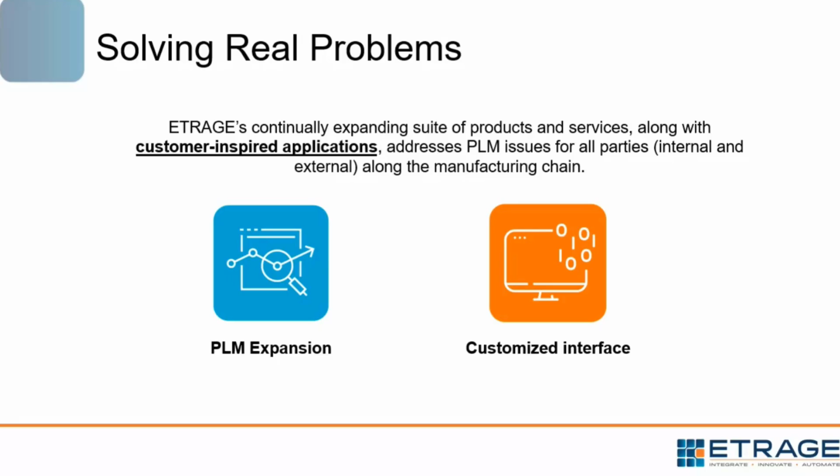Yeah, so I'm just going to quickly run through just a high level why this whole discussion is important and give a little bit of context. And then Ben's going to jump into a little bit more of a detailed demonstration of how we might be able to help you guys with your Creo cabling. This is definitely a deep subject. There's a lot of topics that we can cover within it. So to the extent that anybody wants to connect after the call, we're certainly happy to talk through any of this.

So just to kind of get started, I think I want to highlight what the typical approach to cabling in Creo looks like, right? This is just what we've seen as through lines with all the customers that we end up talking to. You might have some 2D schematic concept design that lays out your bill of materials and the components that are going into your model. You also might do some sort of detailed design in terms of electrical components. You might route your cables, you might place connectors, you might just leave space for those in your model.

But typically what we see in terms of downstream deliverables are in fabrication, where you're ordering a cable or ordering components based on your ECAD definition, because this has that full list of components that you need. And then same thing, you might use a wire list or equipment list that also might come from the ECAD side of things. So just to quickly highlight on the design side of things, again, typical things that we see: some teams use intelligent ECAD tools that have metadata that is exportable.

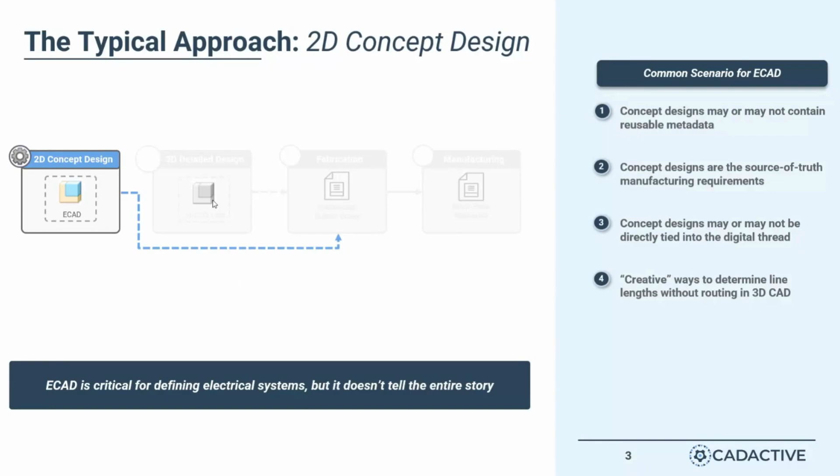And so the problem with this is that there's no spatial awareness of how the cables might be routed, where they fit, if they go around this corner properly. So we see a lot of companies getting real creative with how they determine line lengths, whether that's just in a first article, doing some rough measurements, or sort of hacking it in the Creo side of things and building something that's not necessarily reusable, but shows the space claim. They might fudge the design a little bit.

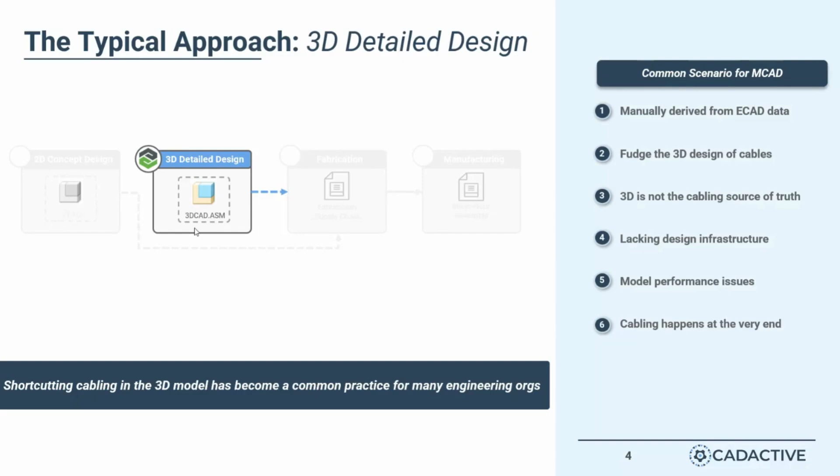Then also on the 3D design side of things, I think there's a lot of reasons why folks don't route cables in 3D. It's hard to do. We're going to get into that a little bit at the end, but this kind of results in cabling happening at the end of the process. You kind of need your model to be mostly created in order to understand how the cables are going to route through it. But a lot of companies are shortcutting this 3D detailed design for electrical today.

And on the design side of things, we're already strapped for time. If leveraging the 2D schematic works for your downstream deliverables and you figured out this process and it's been in place for many years, it's hard to change. Mostly because that value recognition happens downstream. If we build better 3D cabling models, there are benefits downstream, which we'll cover. But the design teams aren't necessarily seeing that as a benefit for them. It's more of an extra thing on your plate.

And so what this results in are folks and companies not changing, staying at status quo. If they do go and tackle 3D cabling design, maybe one or two experts know how to do it. That creates bottlenecks, that creates scalability issues. And at the end of the day, it devalues your 3D digital product definition.

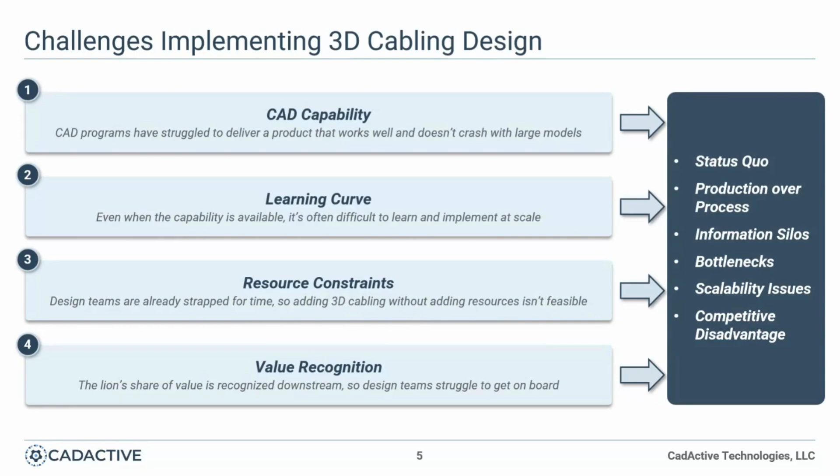And so what are some of those delays and why is this a problem at the end of the day? If we're not building great 3D designs, well, we might not understand that a cable fits where we think that it fits. The bend radius might not comply to the way that we think it would. This is basically just going to create rework. And the later that we discover this rework, the more expensive it is for the team.

We ordered a custom cable, it wasn't the right length. We either have to fix it or order a new one. Maybe you had the wrong equipment in the diagram or in the model. We can't run digital validation accurately. We can't do any clearance or creepage analysis. We can't really create work instructions that show that 3D representation. We're just using the 2D schematic. So it creates a lot of challenges downstream.

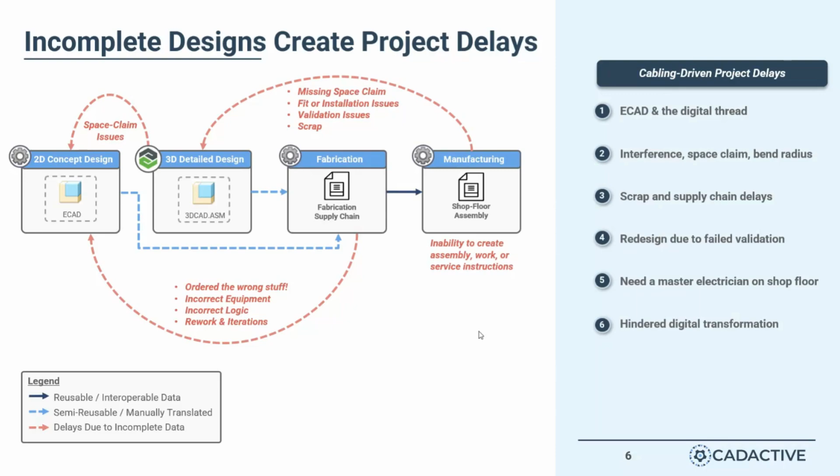And then I think what we would propose and what we see as best practice would be connecting that 2D concept design with your 3D detailed design and leveraging that 3D detailed design as the source of truth for manufacturing. And this is basically the other side of the coin. We know that we order the right stuff on the first try every single time. We uncover issues with our product earlier in the process. We remove late stage rework. We allow for Industry 4.0 and cutting edge technology like model-based, like digital work instructions. We can use that 3D definition for a lot of things.

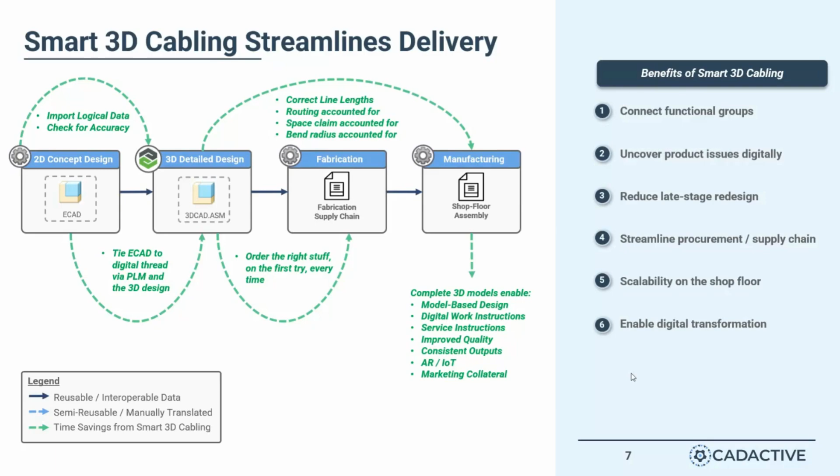And I'm certainly flying through here, but yeah, so how do we do it? CadActive is a company that can help you guys modernize your electrical design. And there's a few ways that we think about that. Number one is to take that 2D data and connect it with the rest of your organization.

Natively, Creo Parametric can ingest Creo schematics files, but it's rare that we come across a company using Creo schematics today. So there's a decision point: do we need to change our whole ECAD tool, or is there a way to integrate something like Capital Harness, EPLAN, or Zuken into Creo?

That's something we've helped a lot of companies with—not having to uproot that whole schematic design process, but still being able to leverage that intelligence in the 3D model.

Then on the 3D side of things, there's typically an implementation effort with Creo cabling. That just means setting up your design strategy. The thing with cabling is that it has to happen in context of a larger assembly, so we've got to do things right so the model doesn't break, you don't have performance issues or crashes, and so you can feasibly perform the design.

We need to create standard catalogs, components, and spools that match your schematic components so Creo knows what it's ingesting from the schematic design.

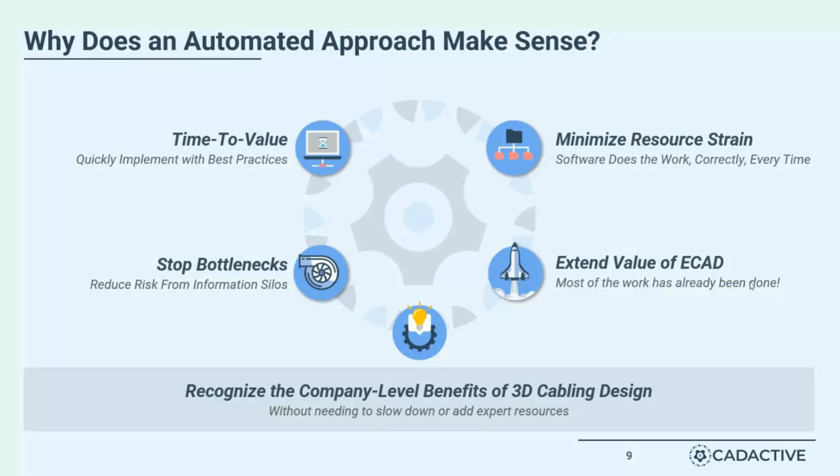And that's all I had to show—so, certainly at a high level. I think we want to talk to you guys a little bit about some of the tools that we've created within Creo cabling, and I'm going to pass it over to Ben for that.

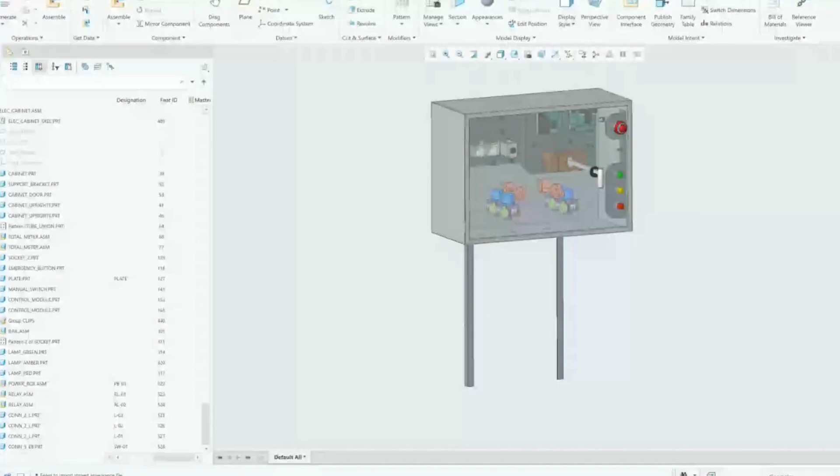So here we have a model of an electrical cabinet, and the first thing I'll do is switch to a simplified rep so we can see things a little better.

Basically, where we're at right now, we have our connectors and everything assembled into this model, but we have nothing in the way of a harness part. We have no network. We don't even have the spool files in here or anything like that. So the goal of this demonstration is to do all of that.

Create what we consider to be a best practice—this doesn't have to be the way that it works, but it's just the way I'm set up to work with it. I'm going to create a subassembly that contains my harness, and it's also going to contain a skeleton model with all of the copy geometries and references needed to create that harness. For anybody not familiar with skeleton models or copy geometries, it's just a reference management tool within Creo, a way to reference copies of geometry instead of the source geometry so you can minimize the size and time it takes to calculate your references.

It's just better for model performance, and it can help reduce errors in your model tree by being more conscious of the references you're making. So at a high level, we're going to create an electrical routing subassembly, have a skeleton model in that with all the references we need, and then create a harness part and route a bunch of wires inside of this cabinet.

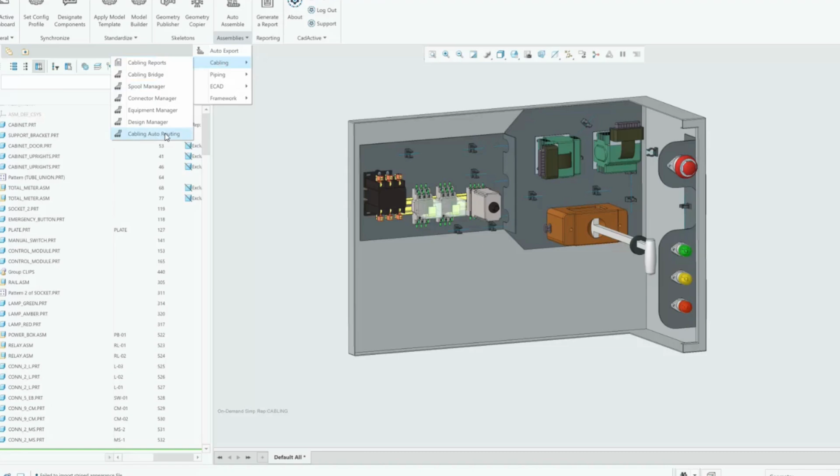But the reason I bring that up is I don't even have the cabling application active right now, and I'm still able to access our auto routing tool and do all of this cabling work without even turning on the cabling application.

So this is our auto routing GUI that's going to pop open here. I can either select an assembly that's already existing, or I can choose to create one on the fly here, which is what I'm going to do.

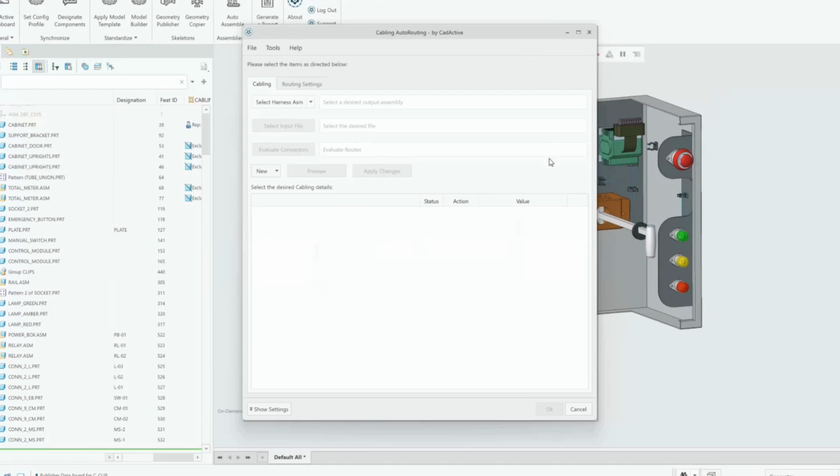I'm going to follow a standard naming convention here. My top level assembly, as you can see up here, is elec_cabinet, so I'm going to name this elec cabinet routing, and it's going to have all my routing information in it. You can see a bunch of stuff happening down here in the message log. Once this finishes creating, I'll show you what we actually just did.

Should be about done here. There we go.

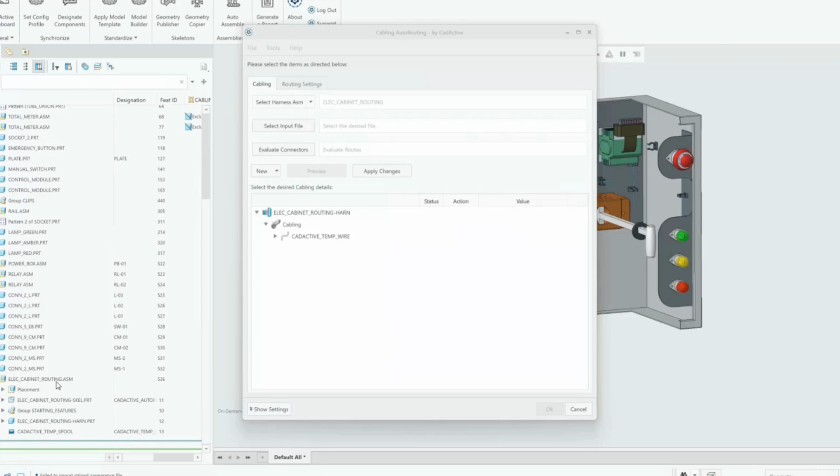So here is our subassembly that was created. Inside of it, I have a skeleton model, like I mentioned. If I look in that skeleton model, it has a whole bunch of stuff that just got created while we were waiting. All of these are grouped by model, by component specifically. And then inside, if I open one of these groups, it has a whole bunch of copy geometries of all of the relevant things from that model.

In this case, CM01 is a connector here. It has a whole bunch of entry port coordinate systems, and each one got its own copy geometry. Specifically, these are external copy geometries. Again, that's just something we consider a best practice. All of this is configurable—you can make it in whatever way you need—but by default, this is what we consider to be a best practice, these external copy geometries.

We also created a harness part inside of here. For right now, that harness part has a temporary wire feature and a temporary spool that we put in here, but essentially this harness part is empty for the time being.

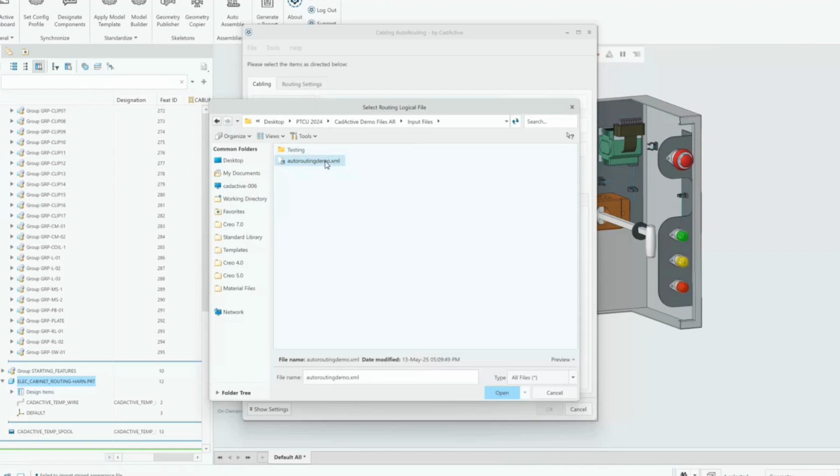The next thing I need to do is go find my input file. So here I have my autoroutingdemo.xml, which has information about a whole bunch of different wires that we want to go route.

And that might come from your ECAD tool, right? Whatever it is, whether it's schematics or Zuken or EPLAN or whatever—we'd expect that to be a direct export from your ECAD tool.

So before I actually hit go on this, I'm going to flip over to this routing settings tab. In here, we have a whole bunch of different algorithms that we can use to solve for the path, the A to B path that we want to use. Here's a list of the different algorithms we offer. I'm going to pick this one.

Then there are a bunch of different variables that control how hard the algorithm is supposed to work. It's kind of a seesaw, a balance—we want it to work hard enough to give us a good result, but if we crank all of these variables way up, it's going to work really, really hard. It's going to take more time, and we might see a minimal benefit as far as finding the right balance for these. That would be part of an implementation process.

These values may be different for different companies based on their models and particular use case. So as part of implementation, we would usually do a study and run tests with different values for these variables to find a sweet spot—where we can live with the amount of time it's taking, and the results we're getting are pretty good. So I'll just tweak a couple of these.

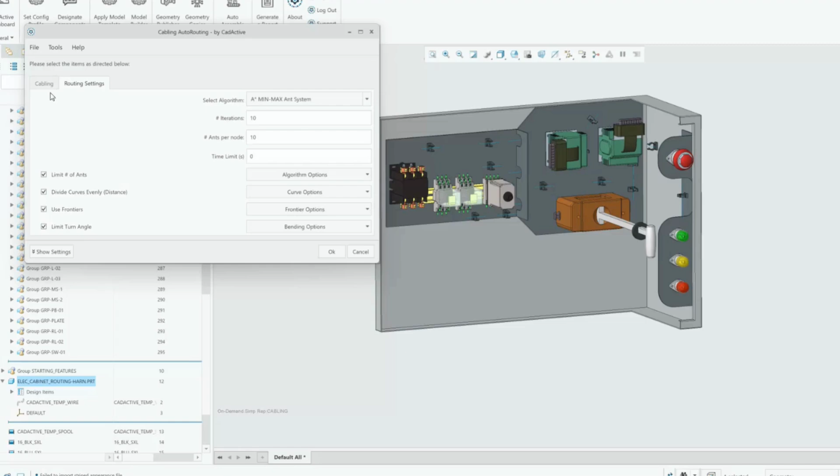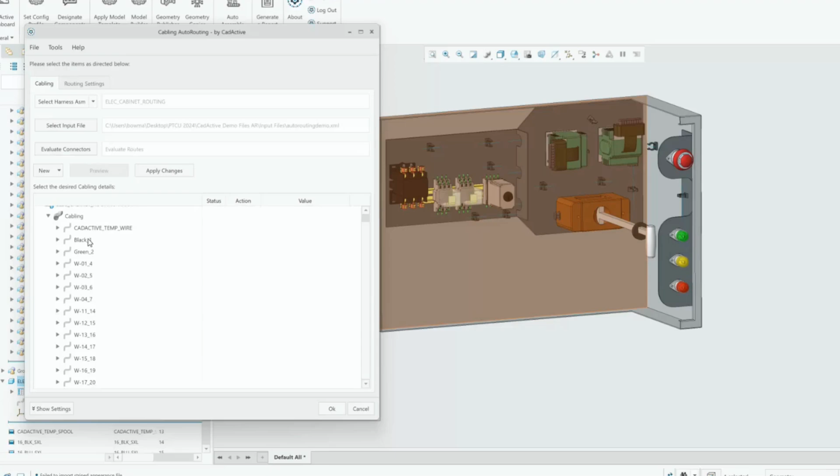We also have the capability to save profiles into the web application portion of this. You can save different profiles and different values for the settings within those profiles. The idea being that maybe you have a first pass and a second pass. Your first pass is a little bit rougher, but it runs really fast. So you run your first pass, and that's good enough for 90-95% of your wires or cables that you're routing. But then there's a couple that maybe don't look as good as you wanted. You can just go specifically to those 2 or 3 wires and change their routing profile to be second pass, or whatever you want to call it.

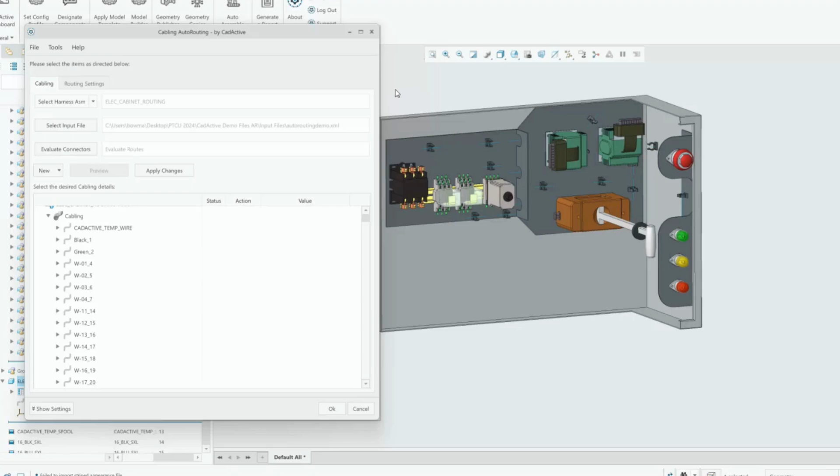And now just on those couple that need the extra calculation to be done, they can take a little bit longer for just those few, but now we're not waiting on the entire model to have those same routing settings on everything. All right, with that being said, let's go ahead and click OK.

So while this is evaluating, I do want to talk a little bit more about that input file. Like Phil mentioned, this is something that's going to come from your ECAD tool. As long as you have an ECAD tool that is intelligent and you can export information from that tool, that's typically good enough. If we can get information out, we can get that out and do what we need to do to get that into a format that we can work with.

So of course we work with Creo schematics, obviously. But for example, this XML file that I'm looking at in this example, this is a format that we got out of AutoCAD Electrical. So again, the ECAD tool that you're using does not matter. We can take any sort of format and get it into this tool and use it to auto route these wires.

And then another thing that I would say about this, so I'm running it manually right now. I'm actually clicking the buttons and saying OK and feeding in the input file. We also can run this in batch. We can run it in non-graphical mode.

You can have a worker machine that's just set up with some listeners, and as orders come in, it populates a file in a certain folder, and that kicks off an event where that worker machine now spins up Creo in non-graphical mode, opens the model, runs auto routing with the input file, saves it, and stores it in a different location. And all of that can happen without the interaction of a user.

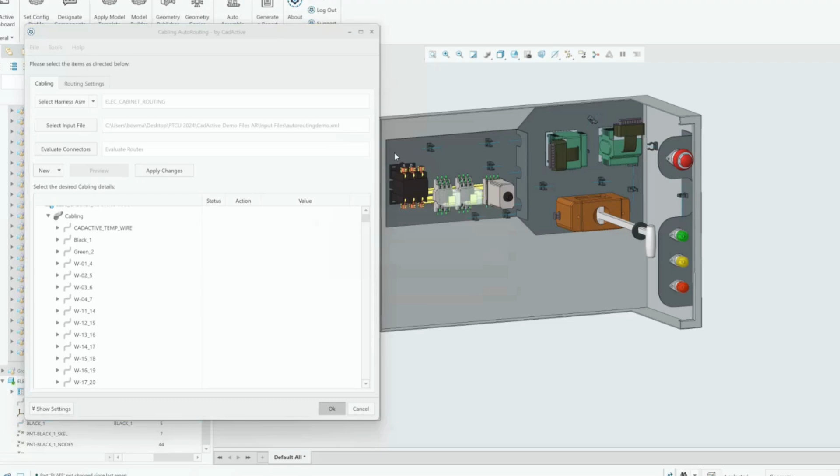There we go. And now we're done. So this went through and routed all of these wires.

If we look in the harness part now, we can see there's a lot more features in here than when we first started. I have the settings on here set up in a way where it's creating a bunch of these point features. This is really, I think it's worth showing here. This is kind of showing the points that are being evaluated by the algorithm. And then finally, this final point feature - these are the points that are actually being used as cabling locations to create the route, the shape of this route.

So like I said, I have my settings so that it creates all of these. These are the things that are being evaluated no matter what, but I can turn that off, and essentially what I would get would be just my wire feature and then one point cloud feature that contains all of the points that are being referenced.

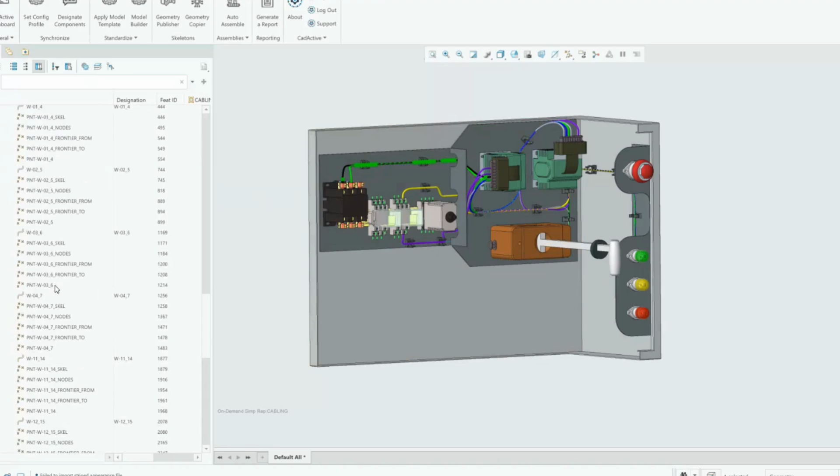Just to show another example, I think this one's good. You can see all of these points that are being considered and used for the routing. But yeah, that is really the main point of the demo.

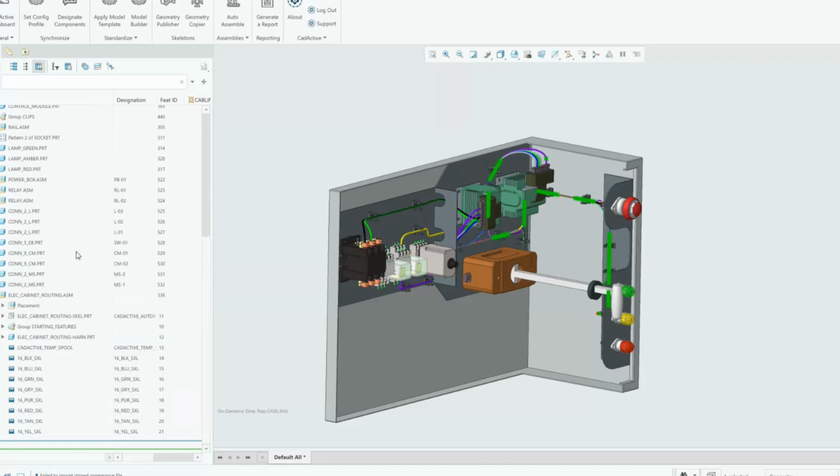So if we were to take a step back and summarize from a high level, what did we do? In that short amount of time, we created this good structure that we consider to be a best practice. We're not relying on people to remember exactly how we want this set up. It's all driven by the automation. We've created that subassembly with our good structure, built out a skeleton model with all of these different copy geometry references that we want to use for our harness, and then, of course, created our harness part and routed all these wires.

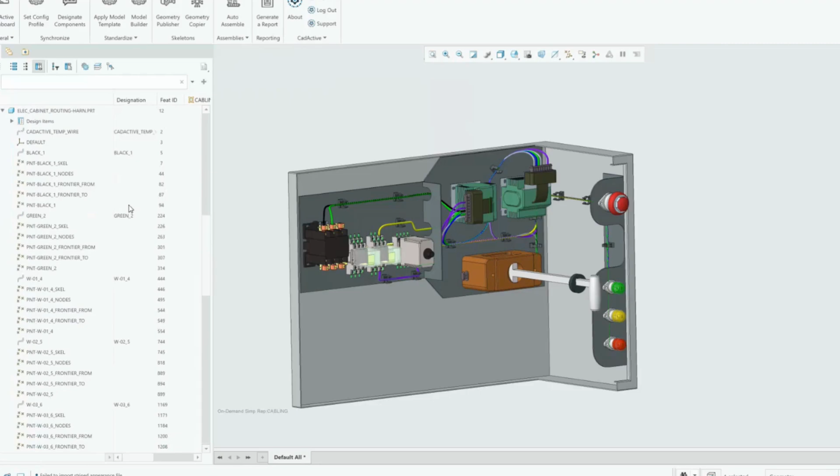I'll point out there is no network in here. Each one of these wires is having its path solved by the algorithm. It is creating those points per wire and then routing the wire along the points in that point cloud feature.

One other thing I'll point out, just a final point. The way we are working with this demo, the connectors themselves are not inside of this subassembly. That's just the way I have it set up to be working right now in this environment. That does not have to be the way this works. We can set this up to not happen within a subassembly at all if that's the structure you need, or we can set it up so that the connectors are brought inside of that subassembly.

We can actually use another tool of ours called AutoAssemble that can be rolled into the auto routing process, where you supply an input file, say go, and before it starts solving for these paths, it can actually assemble all of the connectors and electrical equipment that you want first. So instead of having this stuff already sitting there, we could have assembled our connectors, designated them, and then created all the wires and routed them.

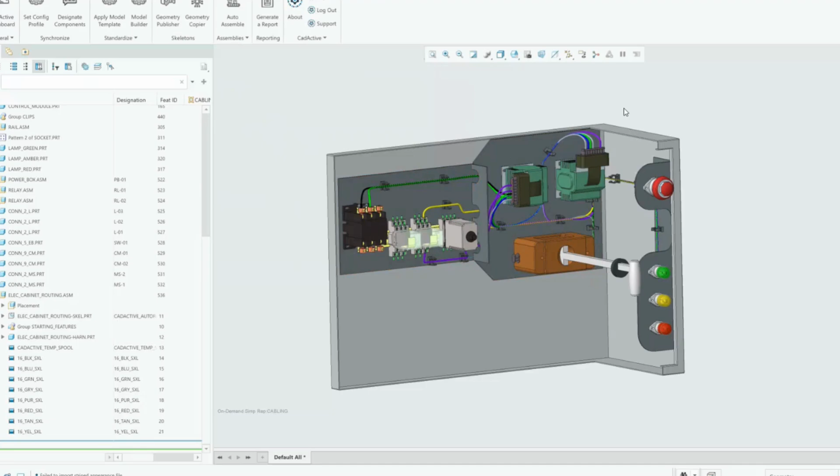So just a couple different options. Like I said, it's very configurable. There are a lot of different ways that we can set this thing up to work depending on the use case.

But yeah, with that being said, I think we can probably pass the ball back and move on to some Q&A. In terms of use cases, like Ben said, we've done some really high volume use cases in command line, non-graphical mode with this.

We could run this in point-to-point wiring, kind of like you see here. We could run it with a complex cable and take bundle width into account. We could run it with a complex harness that has different branches on it.

One of the points that Ben has touched on a few times here is that we're offering an off-the-shelf application, but it never looks the same for two customers. We typically configure it on a customer-to-customer basis so that we know it works the way that you want it to work, and then we let you run with it. You don't have to fit into our structure, we'll fit into your structure.

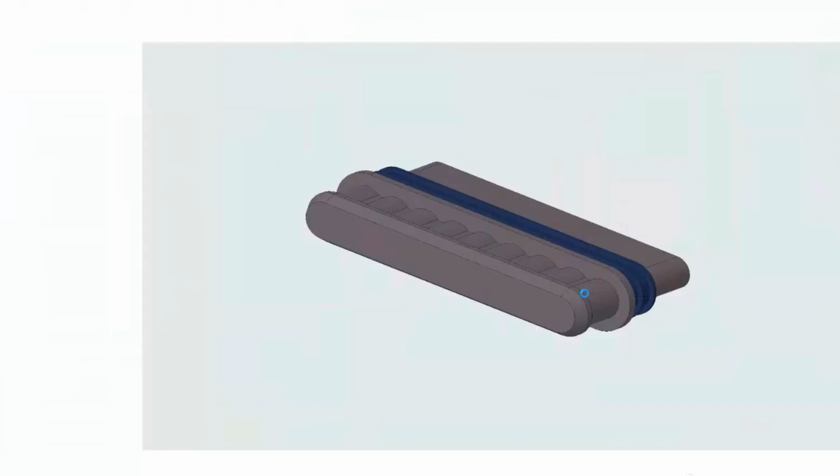Okay, so I'll open up one of these connector models. This is part of a library definition, and this is actually something you can use with or without our tools—it's just part of Creo cabling functionality. So on this model, there are a whole bunch of these coordinate systems that are all intended to be used as entry ports.

Let's see if these are set up properly. These actually are not even set up properly, so yeah, we are handling this and being able to route to and from these even though they don't have the proper parameters on it. But what I was going to say is, this is the part that's just native Creo cabling, whether you're using our tools or not.

If you go to these coordinate systems that you want to be using as entry port coordinate systems, you can create a parameter on here that is entry_port, set it to a Boolean, so a yes/no, and then set this to be yes. Because this coordinate system has a feature parameter on it—these parameters are on the coordinate system feature itself, not on the model—this coordinate system can have this entry port parameter set to a value of yes.

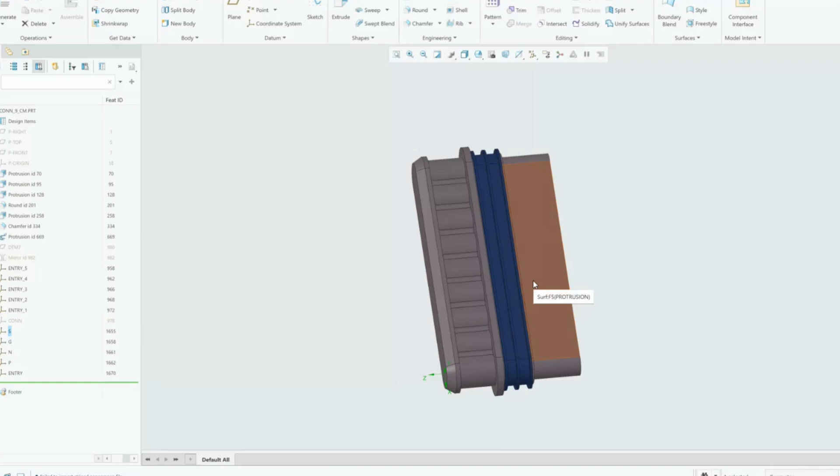Now, because that's there, if I were to use this connector in an assembly and designate it—I'm sure you're referring to the normal process, where you designate that connector, then say entry ports, and have to go control-select all of the coordinate systems you want, then set an internal length if you want, all those other things—having that feature parameter on this coordinate system bypasses all that. So Creo, when you designate this connector model, will find that parameter on the coordinate system and automatically understand that this is supposed to be used as an entry port.

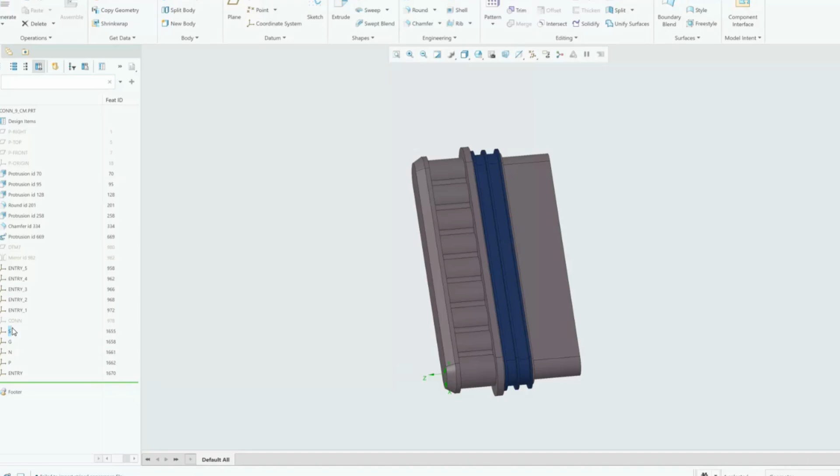We can also have other parameters. You can have an internal length parameter here, a grouping parameter here, a pins parameter here. There's a whole set of feature parameters we can use on here that will automatically propagate information into your model where this connector is being used.

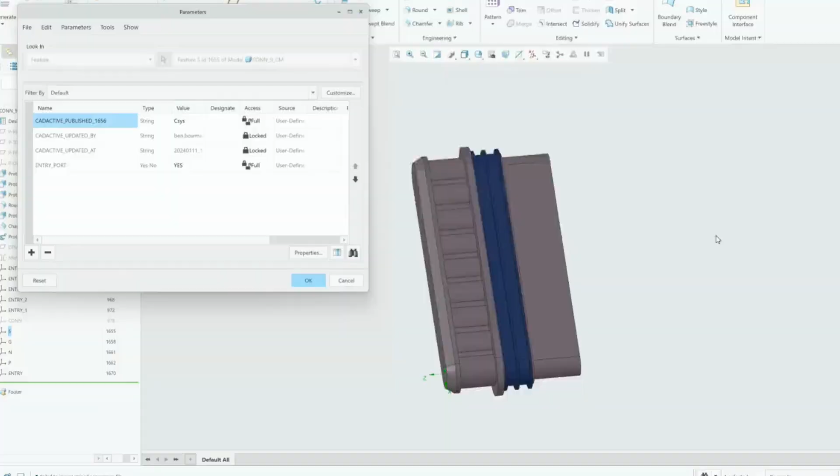So I guess that was a long-winded answer, but in summary, we obviously don't have to have that parameter there to use it, but that's typically a good idea as a part of your library management process. When you bring in connectors, you add these feature parameters onto those coordinate systems, and it can speed things up for you down the road.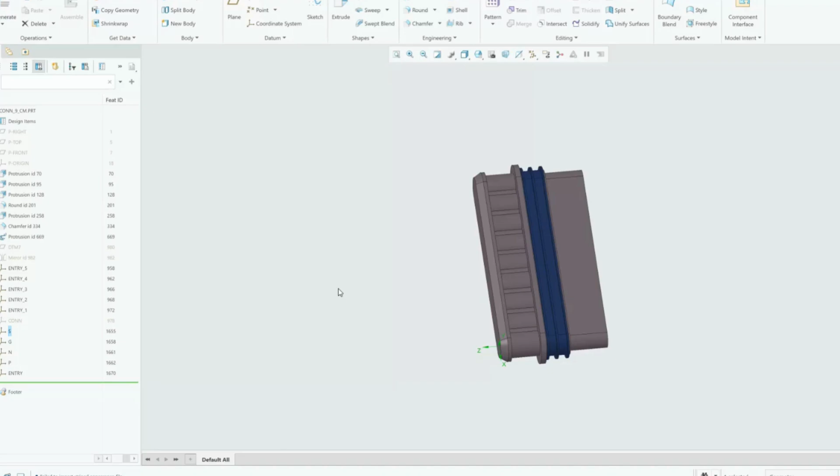All right, got a few more for you. For the routing rules, can we define specific clearances we want to keep away from other component hoses or tubes? Okay, that's a good question as well.

The way we are set up today, we can provide information to these routes using a couple parameters called use path and required path. With use path, as you're evaluating the route for this wire, we want you to try to use anything that has a naming convention that looks like this. Required path is saying, I don't care where it is, if it has this naming convention, you have to use this as a part of the route.

The idea here being—I think of one of our use cases that a customer is doing—they have certain areas where there's like data wires versus paths that are supposed to be used for power cables, AC versus DC. They have things like that set forth in their model.

Another good idea would be like, if you have a cable tray or something like that, use that in the use path—use any cable trays essentially. Any of this information that we can provide into the model or algorithm is going to help make the route better. In this case, I basically said try to use clips, and so it's routing through all these clips, the ones that make sense for the particular route. But in terms of interference detection, that is actually something we are still working on adding.

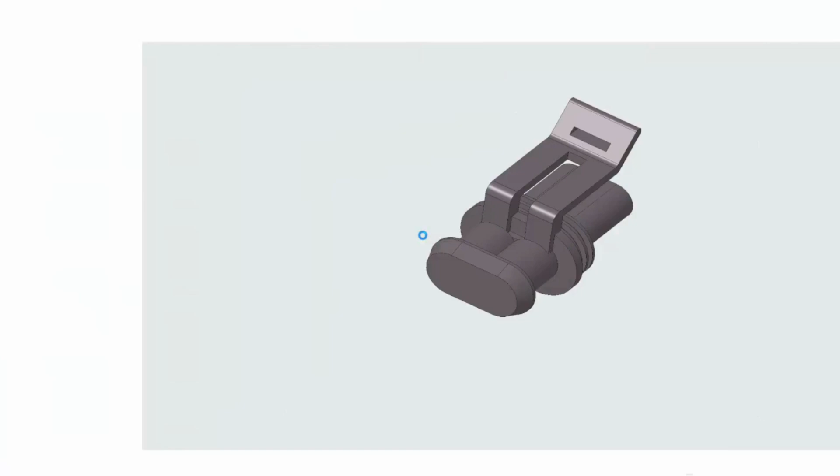And let's go look at that. We use published geometries—again, this is a part of library creation. We have a connector that we're bringing into our library. As a part of that process, we want to do a bunch of things: set it up in our start part, make sure we have certain datums, certain planes and coordinate systems, add the entry port coordinate systems, and maybe add certain parameters, simplified reps, and orientations—all that stuff that's part of bringing this in and calling it a good model in your library.

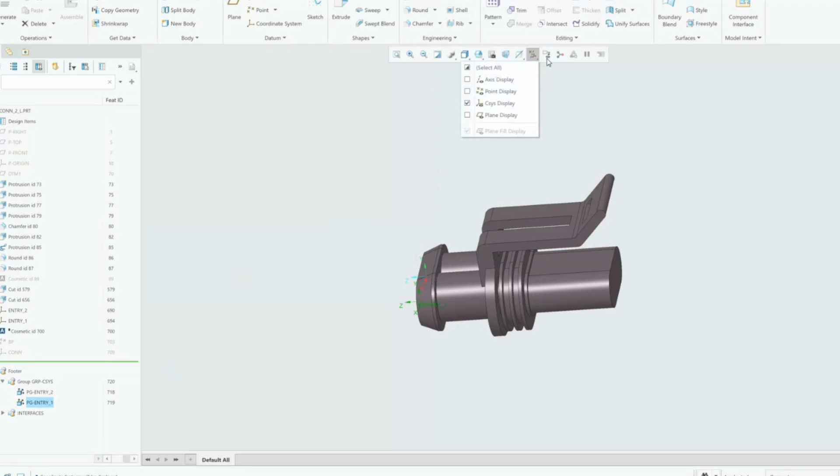What we recommend is just adding one more step to that process, which is publishing important critical interfaces or datums within the model. In this case, there are a couple of coordinate systems here, entry 1 and entry 2—we have published both of those coordinate systems. All that's doing is stating that we know these are important things and we're going to care about them later.

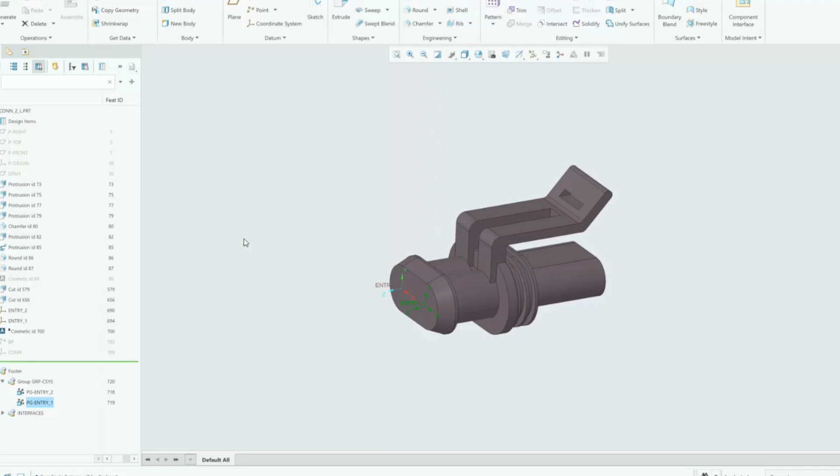What that allows us to do is create a lot more automation. If people are used to using published geoms and copy geoms with just Creo out of the box, when creating copy geometries, you just select a published geometry and it creates a copy from that published geometry. We're using it within our automation to flag something important, so if anything is published here, we know it's important and should be considered when creating our copy geometries.

So what does that mean? We look at every single designated model, and that's how these groups are named. This is all per model. Let me turn this off so it looks a little clearer. Per model, we have one group. And inside of those groups... which one do I have open there? Okay, whatever, this is fine.

Inside of that group, it's all of the copy geometries that are relevant to that one model. We create one copy geometry for each published geometry that exists. So this model has 1, 2, 3, 4, 5, 6, 7, 8, 9, 10 coordinate systems that were published. Therefore, we create 10 copy geometries to match one-to-one with those published geometries.

All right, hopefully that fully answers the question. It's an implementation question, really. It's a setup we do one time with your catalog parts, and we can use that moving forward.

Last question: can the routing rules be altered on the fly? So on the fly, like when you hit go and it's actually running through the algorithm, there's no way to change things on the fly while that's happening. But what we can do...

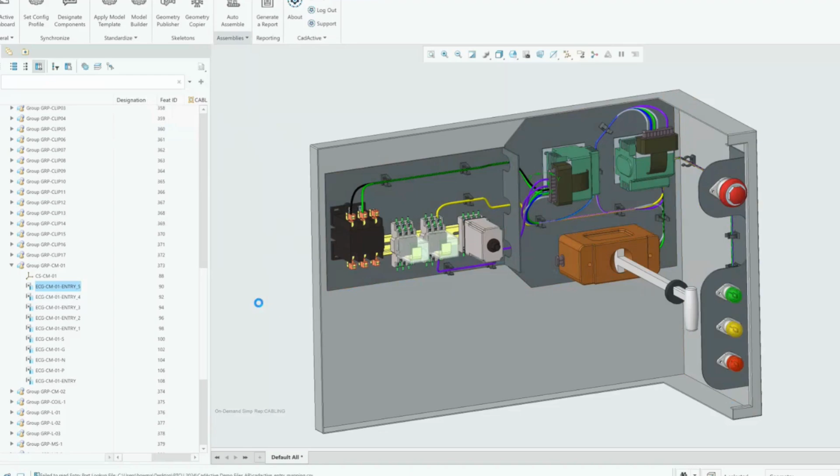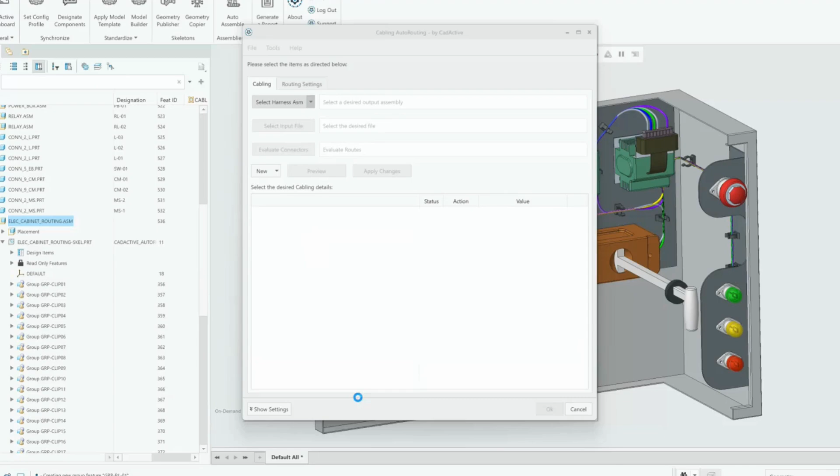In our auto routing interface here, I'm going to select my harness assembly. Now that all of this has been created, whenever I select that harness assembly, it's like scanning the assembly and it's going to populate down here with all the stuff that exists inside of it. There we go. So it's reading all this information in now from the model, not from an input file like it was before.

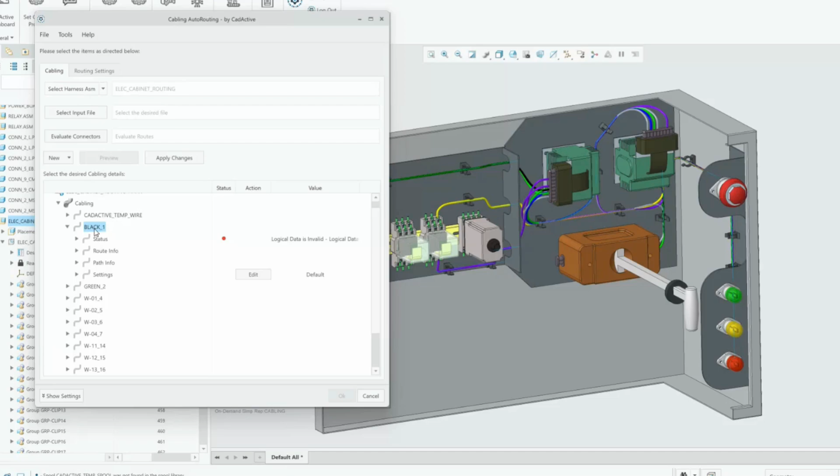But what I can do, if I right click on... oh, you know what, this might be, oh, I'm using a previous version of this code, but we have a newer build where we have already integrated this in. I was just trying to use something that I knew was really stable. But basically, we have an updated build where we have already tackled this problem.

In my list here, there's all this information about this particular wire. Like we have a status, right? Routed status—it's a green icon here to tell me that yes, this is routed. The path status, yes, it has a path, and that has been solved for by the algorithm. Right now our red icon here is leading to the overall status icon being red. That's red because it's missing logical data.

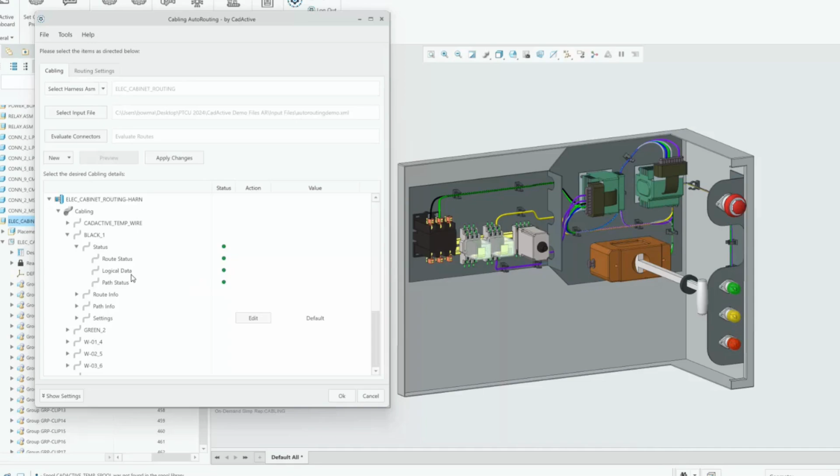Well, that's just because I haven't input that file. Like if I go in here and input my auto routing file, now we see that status has gone green. Oh yep, okay, now you've told me where that input file is. I can actually verify and check that against what's in the model. The green indicator here tells me that the logical data matches what is in the actual model. So that is what this first part is.

Then we have our route info. This is telling me where's my from, where's my to, what's the spool that's being used. I can edit any of these on the fly. We have the path info—this is what I was talking about with use path or required path. We can also have specific included or excluded nodes along that path. And then finally, we have our settings down here.

So on the routing settings over here, this is for everything. I also have the ability to come through and specify on a per wire basis what I want the routing profile or the specific settings to be.

Now, to finally answer the question that you actually asked: in the newer version of this code, which I am unfortunately not running right now, when you right click, there is an option to preview the path. So if all the information is there, we have the route info, the from-to, and the logical data, which provides any use paths or required paths.

If I were to right click and say preview path, it's funny, the thing that takes the most time when this is running is actually creating the wire features and connecting it, routing it through all the points. The algorithm solving itself is pretty quick. So that is what preview path is doing - it only does the algorithm, then shows you a preview of what that route is going to look like in your model.

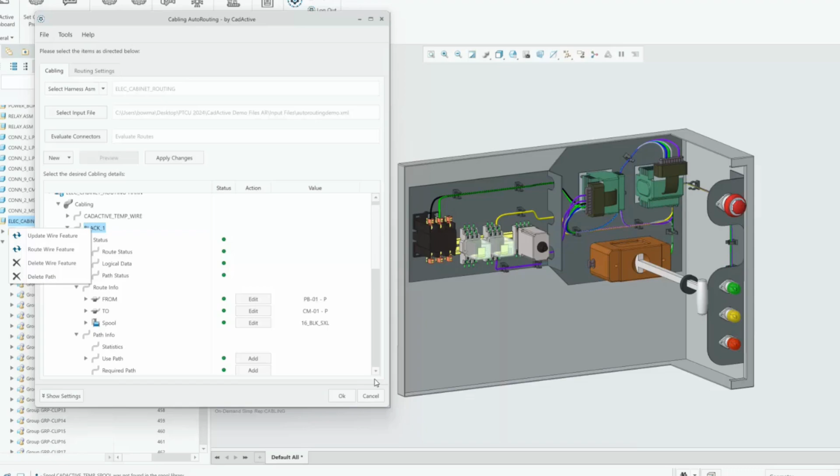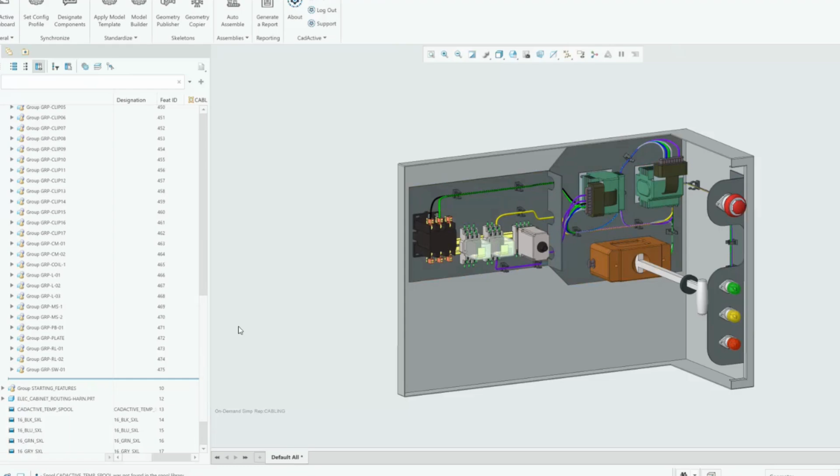And what about MBD? Yeah, so the drawing automation for auto routing specifically, that tool really only encompasses what we've seen here today. It can create a subassembly structure, it can do the skeleton with the copy geometries, it can assemble connectors if you want, and it can solve for routes and create these wire features. All of that is encompassed in auto routing. The flattened harnessing part, the drawing part, that is all something we consider not to be under the auto routing tools umbrella. However, like I mentioned earlier, we don't touch anything on the harness flattening part of it.

We do have some options on the drawing automation front. These are just different tools that we have in our tool belt. Under our standardized option, we have Model Builder, so that's really what we're talking about when we're wanting to work on drawing automation. Inside of our web application, we can set forth a drawing template, we can add any number of parameters, there's all sorts of things. We can do this with parts, assemblies, or drawings - actually, it's not just limited to drawings. We can use that automation to create these things on the fly.

So is there auto routing functionality to automate the creation of the drawing? No. Do we have that covered in other parts of our application? Yes.